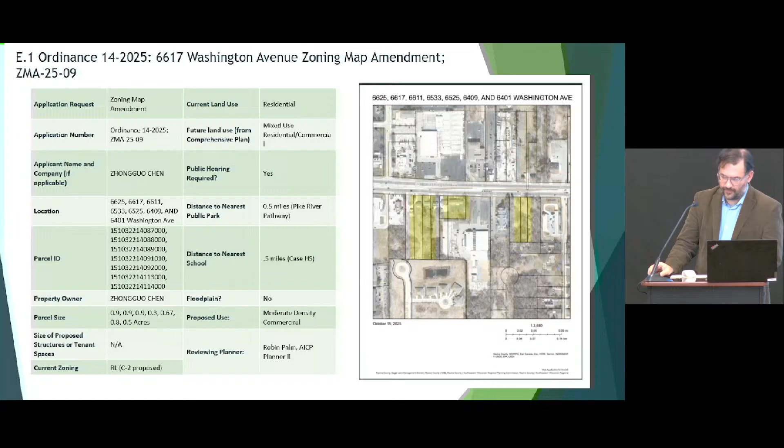The 6525 parcel is also currently split zoned, which you can see right here - it shares the pink and yellow, which is currently prohibited by Mount Pleasant zoning code, so it's kind of an artifact. That will be fixed.

The 2035 master plan lists all of these properties as mixed residential commercial, and given their location on a high traffic state trunk highway, staff's opinion is that it's unlikely any of these properties will have future RL uses or will expand their RL uses. The C2 district accommodates moderate intensity commercial, low intensity manufacturing, and upper story residential. High intensity commercial uses such as drive-throughs, gas stations, and auto repair and car washes are not allowed by right in C2. So it's pretty much zoning it as it has been used for quite some time.

I made a slight error in calculation on 6533. I was contacted by that property owner, Dennis Hardy, who emailed me and Sam about that conversion and was not in favor of it at first. We put up a sign in front of his house and he took it down. I got to talk with him on the phone and worked it out, and told him that his property had been assessed as commercial for 20 years, and that the zoning change does not prevent it from being rented out as a house.

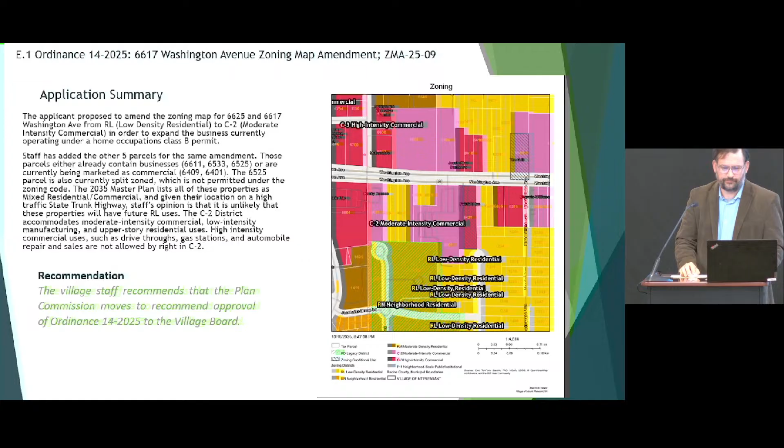I have one question. I drove by this property, and I don't know what kind of business this is or if it generates a lot of traffic, but I was wondering, is that going to create a problem? It's right next to the stoplight by Rocky Rococo's. Is there any way to connect it, kind of like Landmark Credit Union on the other end, and Emerson Road? There's a road behind it that connects with the back end of Rocky Rococo's.

Yeah, so there's actually a potential subdivision that we're in works with, talking to the south. It was an abandoned subdivision back in the mid-2000s, and we're finally cleaning up some of the property issues in order to move forward with that again. That's an issue that would be addressed by that, having a street behind there.

The other thing is, such requirements of access would assume that the building would change, so they would apply for a new building with commercial parking lot and all those kinds of regulations. This would be much like a lot of other homes on our state highways that are converted to businesses. They're operated as small offices essentially. We have insurance companies working out of them, hairstylists. I think Despin's Plumbing on Newman and Spring is just a house that's been converted over. That's the sort of uses that C2 would envision and allow. Any redevelopment beyond that would really need an upzone or more property.

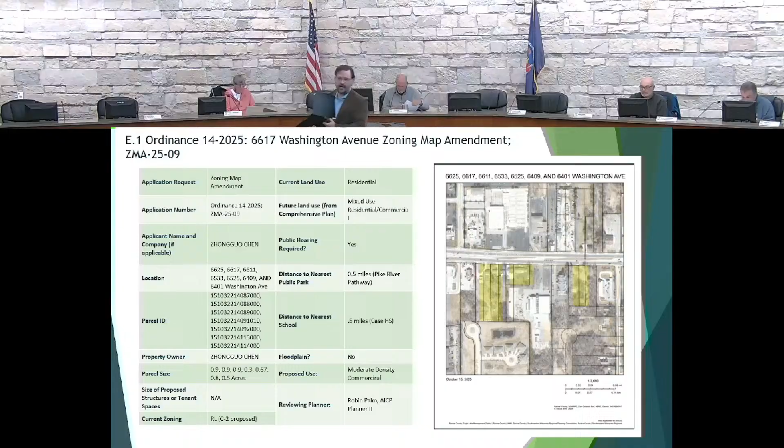Next up is 1501 Meadowlane Avenue Certified Survey Map, CSM 25-08. Mr. Chair, members of the commission, the applicant applied to divide the property into 2 lots. The division removes a double frontage lot, and the new lot configuration matches the lots both north and south of the subject property. Staff recommends 5 conditions of approval.

First, the applicant shall update the map to dedicate 40 feet to the public for the South Emerson Road right-of-way. Per the Village Comprehensive Plan, South Emerson Road is a collector street, not a local street, so it requires a slightly wider right-of-way. Second, the applicant shall update the map to show all the utilities underneath, which we require for new lots, so they can be served by public utilities.

That's a pretty technical map cleanup. Third, the applicant shall update the village's signature area to match the current clerk, Jill. Fourth, they'll need to construct a concrete sidewalk or asphalt path on one side of all frontage streets, or on one or both sides of other streets within the land division. Mainly, the new... we can get into that in a sec. Well, I'll just round back to that one.

And sidewalks, I love sidewalks. Fifth, they'll need to plant street trees of a species approved by you all, which is also specified in our ordinance, along the frontage for every 50 feet of frontage. So these lots will just need a couple trees.

I think the main issue here is sidewalks. You all have the power under land divisions to waive the requirement for sidewalks, as we talked about last month. If you choose to do so, we think it would be reasonable on the Meadow Lane side because there are no connecting sidewalks, and none within even a few hundred feet. But I would recommend we continue to have them on the South Emerson Road side, since they're only a property away from a sidewalk connection that goes through the reconstructed roundabout on 16th Street, within 100 feet of a connecting sidewalk.

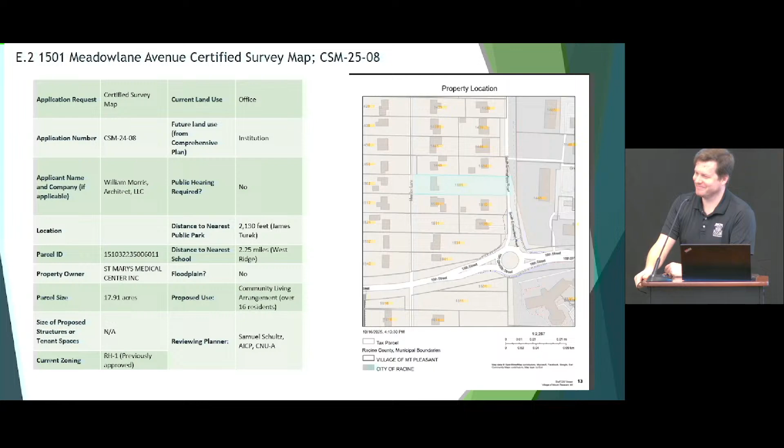And that is it. Otherwise, it complies with all the land use ordinances and regulations.

Yeah, to Robin's point, it gets more legal. Getting rid of a double frontage lot is nice. Well, I agree on that. I think that's really smart of them to do, particularly if they have the intent. I don't know if they're here to sell the other one. There's a huge demand for single-family lots, so they've created a lot of value here, I think.

Yeah, you can see the fiscal performance is not great because we have some low-density uses along Emerson Road, which is a collector street, so that side doesn't perform as well. But it does perform better than it does now because we're adding an additional house.

So it's over twice as good as it does. We typically try to require a little bit more density, but in this case, we'll take what we can get, and I think they're going in the right direction. And to divide this any further would not fit into the neighborhood. It just would make no sense. So it's a nice big lot, which someone will appreciate someday.

Yep, so no other issues. I would just need the motion and then clarification on which side you'd like to require sidewalks, or any other amendments to the recommended conditions.

Question, comment, Claire? Go ahead. The property directly south of the subject parcel has no sidewalk, but the one more adjacent to that to the south does. So is there some vehicle by which we can get at least those three lots to all have sidewalk? Or are we gonna have sidewalk, no sidewalk, sidewalk?

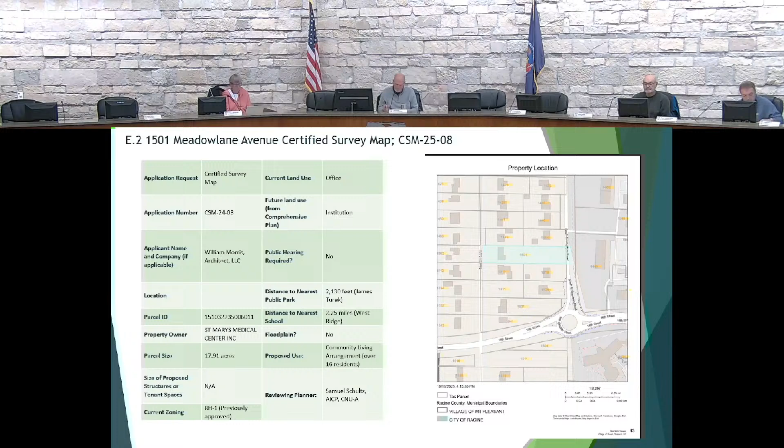Got it. Thanks, Robin. Okay.

Moving on. Item number 3, 6611 Spring Street, Certified Survey Map CSM 25-09. And Sam is still up there. Yes.

Mr. Chair, members of the commission, the application proposed splitting the existing lot into 6 lots and 2 outlots. Lots 1 through 4 would be available for development under the existing RM zoning district guidelines, which set a minimum of 9 units per net acre. Lot 5 contains the existing Aurora Medical Clinic, and Lot 6 provides shared access to the western lots. Outlot 1 contains extra land, and Outlot 2 contains a stormwater pond that serves the site.

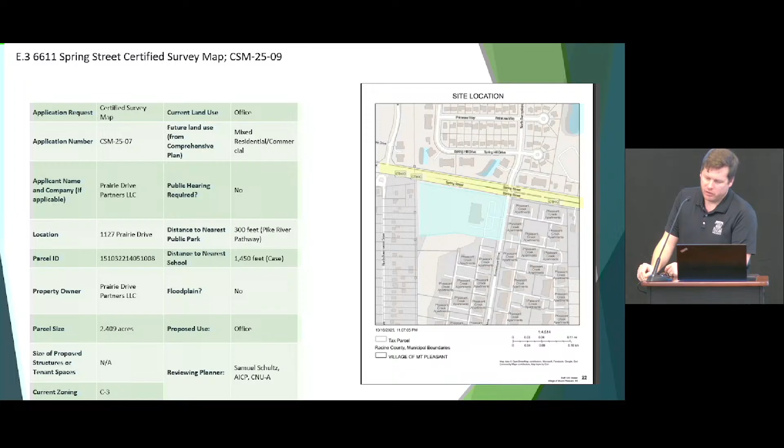The staff recommends that the Plan Commission move to approve subject to 4 conditions of approval. 1, the applicant shall modify the map to merge Outlot 1 with Lot 1. 2, the applicant shall modify the map to change properties zoned RL1 to RL and RM2 to RM — that's just a designation cleanup on the face of the map. 3, the applicant shall modify the map to add the existing zoning within the proposed land division; they added the extra territory around it, but not internal.

And then finally, 4, the applicant shall add the utility information that we previously called out, which they can get from the Public Works Director. So those are our recommendations for approval.

You can see in the fiscal analysis attached that this thing performs pretty well above all our target financial figures and ratios. Particularly, this is a low estimate because we just use the minimum density per the zoning district. If they go in above that, it would likely perform even better. So this is a really nice infill project along an arterial street in the village to add a little bit of density, but still complying with the existing zoning. So we really like to encourage these types of projects.

I think the only additional note, and it shouldn't hold up your recommendation, is that it's a little bit of an odd map when you look at it, particularly Lot 6, that shared access roadway. In large part, that's because some of the zoning district guidelines set a maximum lot size of an acre, so they're not able to pick up some of the ancillary parking for lots 3 and 4 without subdividing that and creating that tooth pattern that you see there. While we don't have an issue, and I don't think any of these lots are technically illegal under our code, it's certainly not our intent that this is how land divisions would look like when they come in. The idea is that you subdivide lots and then design buildings to those lots, and this is trying to merge those processes together.

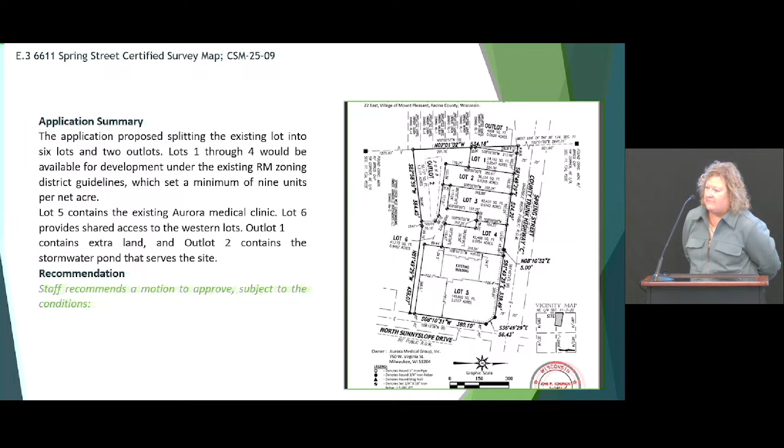Carol? Hi, I'm Carol Keene, I'm with Impact 7 Real Estate Group, 2965 Decker Drive, Rice Lake, Wisconsin. Hi, I'm Jess Timmer, the architect with Rinka. Our address is 756 North Milwaukee Street, Milwaukee, Wisconsin. Happy to answer any questions you have.

I think this is a little bit of a first-time process for all of us, having to subdivide - because we have four different buildings, instead of approaching it with one single lot, it's literally subdividing each lot to make sure each building meets all of your zoning requirements on an individual basis, and that they can stand on their own. So they're meeting the maximum lot size of the acre, the parking requirements, the open space, the minimum density per acre requirement, which I think is nine, but we'll exceed it on some of the lots, which is good. And literally kind of testing the zoning code as written, which you guys just updated, I think, in the last six months or a year or so.

But Sam's been super helpful, informative. We walked through the entire process. I think the plan for this is going to be great in terms of bringing more units that are badly needed in the area, that's going to be still high quality architecture with a mix of scales. We're happy to tell you a bit about the buildings if you want to know more, even though I know it's not maybe subject to your purview.

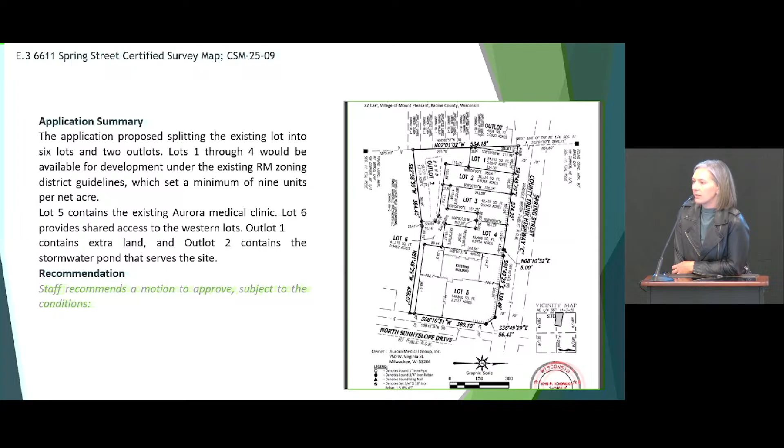So there'll be two of the buildings that will be single story, sort of what we call a cottage style - individual units on ground level with attached garages. And then the other two buildings will be kind of what we call a garden style, so two stories, also with some attached garages, some with detached garages. There'll also be bike parking on site, and then there'll be a clubhouse, an amenity that's shared across them. And then one of the outlots is the stormwater management and the bioretention pond.

Part of the preliminary site planning, we did this in conjunction with Aurora, trying to be good neighbors with them and discussing—Jackie's here, sort of on their behalf—to do something tasteful next door, basically. Instead of going much denser, which we probably could have, we wanted to be good neighbors and do something tasteful in the area.

One question you guys had was lot 6. That is part of our purchase agreement with Aurora, so we had to incorporate it as part of the purchase of the development. That's why it looks a little funky, because we will now be in charge of that easement coming into the overall development. That was part of the purchase and sale agreement for this 5 acres.

Do you guys have any other questions? We could knock out the site planning right now today if you want, and just stamp it and be done with it. Well, I see one thing—it's called Pike Creek Commons. Is that what it's called, one development?

It is one development, yes. Okay, that was my main concern when I saw the lots—wait a minute, this is really going to... and then you also mentioned you're going to have a clubhouse. Right, which is key to that—it's actually a single development. Exactly. And it looks funky. When you look at it, you're like, holy cow, I don't want to see that in my community.

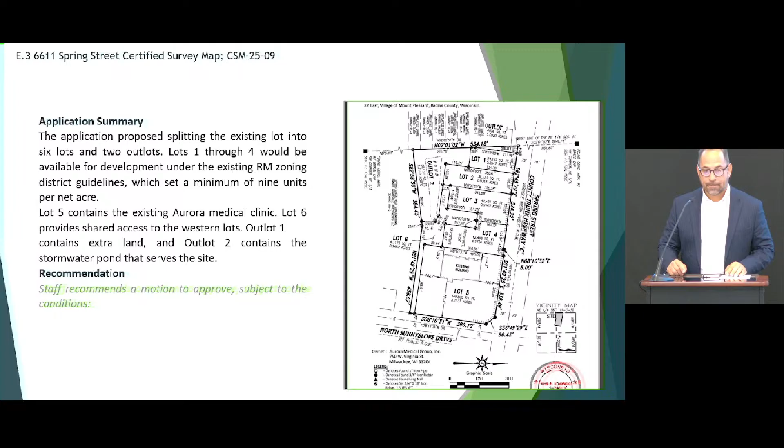Just to comment, even though it's not subject to our review, I think what I'm hearing is it'd be wonderful to be able to see plans and elevations, just to give it some context, if that's not forbidden by our code.

I want to be extremely careful about that. I understand the Plan Commission would like to see that. However, anytime state law requires that if they submit something and it complies, we have no option for residential development but to approve it. You have no legal leeway to deny a residential development that otherwise meets the zoning code. So while we'll try to provide more information, we're trying to dance carefully about not setting expectations for something you don't have any say over.

I think when we made that change to the code, that was an area where we had discussion about it and weren't real happy about it. The Plan Commission had a review taken away from us that historically had been in the Plan Commission's hands, giving us the opportunity to weigh in on these questions, rather than having items before us to approve that we couldn't envision how they would function. So I think that is a reasonable request, and yet I understand Sam's point.

Yeah, I mean, we're not trying to withhold information from you by any means. We're just trying to make it very clear about what you actually, by statute, have the authority to approve or deny. That's why we've shifted this focus more toward land division, which has created this whole downstream effect.

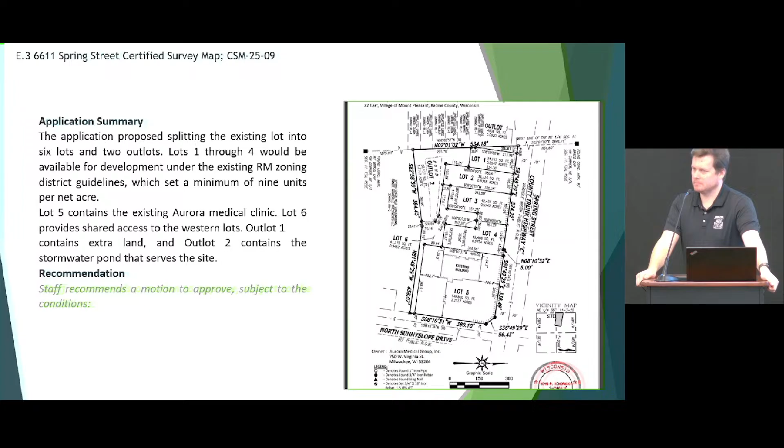It's a very obviously open spot, and everybody's going to go, what's going on there, you know? And I think it would be nice for the neighborhood to know that, hey, it's going to be a quality built housing project.

I just want to add, if it brings in access and circulation and stuff like that, and if the buildings being put on them makes that difference, that certainly comes under the purview of a lot split and what your review can be about. You could be able to say, well, on lot 2 the building's facing the wrong way, whereas this is how it should align for better access. That would come under this purview and something that you can review, I think.

But you wouldn't require it. Okay, now we have staff conflicting with each other. I don't know about that, but it couldn't relate. We should move us along, but we have 3 other items that absolutely need to get voted on tonight, so if we could call the vote, unless you have any other questions pertinent to the land division itself.

I do, if I might. My question is, first of all, these are rental properties, are they not? Yes. Okay, so my question has to do with the 45-foot access. I thought that under our code, anything being subdivided had to front onto a public right-of-way that met our right-of-way standards of 66 feet. Not if they have shared private access.

Okay, number 2, my comment is I would prefer to see this as a condominium plat, because in your review some of the comments you made were about if they want to sell off a building or sell off a part of the project. I think this bodes much better for some kind of a condo plat and overall site plan, because in my mind it would be ridiculous to sell off any part of this on a piecemeal basis, since you have a clubhouse and different types of units. In my mind it's one project that should not be sold off in pieces. So I would certainly promote that — again, we're still working with the code, still trying to figure out where it works and doesn't work, but in this case it certainly would have made sense to come in with it platted as one project. The setbacks still would have applied, so I understand.

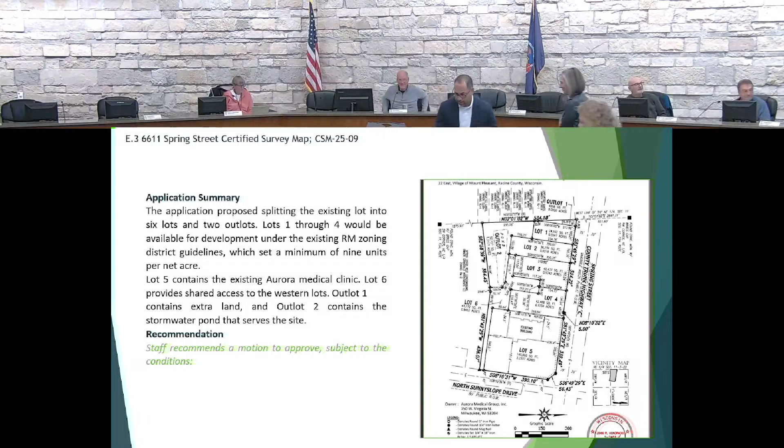Good luck, it'll be nice to fill that in. Be interesting to see the minutes for this meeting. You can talk to Brandy about that.

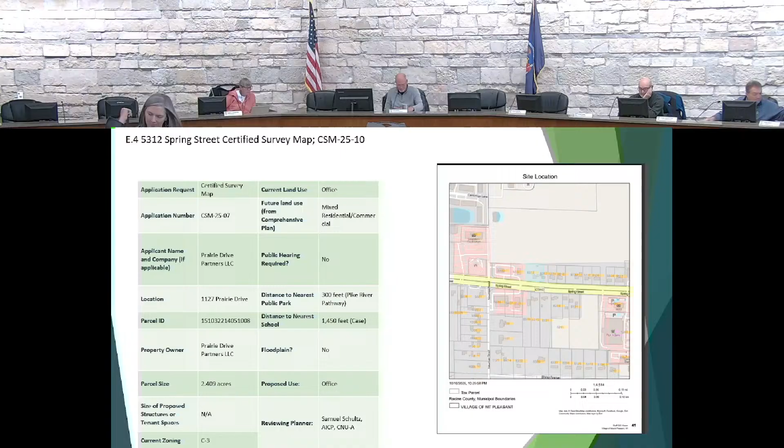Condition 1: applicant shall obtain approval from the Racine County Department of Public Works for any additional driveway connections to Spring Street, which is also County Trunk Highway C. Upon review, I did send this over to the county, and they said they would not grant an additional driveway access. So instead, I'd like to amend condition 1 to say the applicant will need to update the map to show cross-shared access between lots 2 and 1.

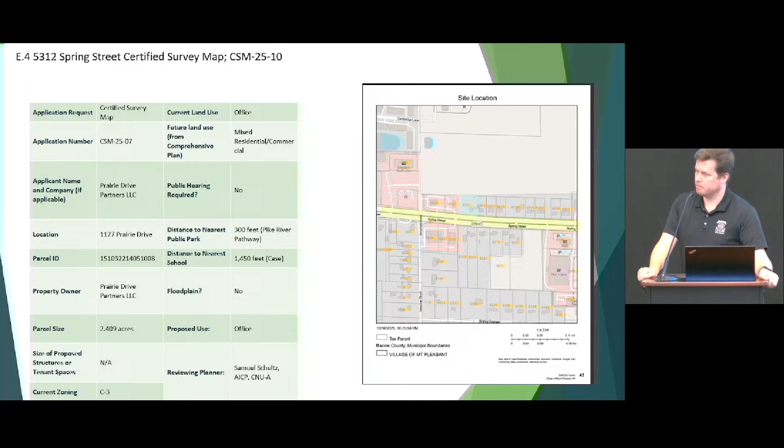Oh wow, that's going to be tough. It will be very tough, but that's too bad—pretty black and white answer from the county. They said it doesn't meet their adopted width for access standard requirements anymore along the county highway. So I don't think they'll get one. They could try to apply for some sort of variance from the county or whatever the county's approval process is, but that's between them and the county. I think in the meantime, to allow a developable lot, we have to force that shared access.

Yeah, but the way their house is turned, they can't even put them side by side. Maybe they can work with the county to relocate an existing driveway and bend it and still do it. But yeah, it's going to be a little bit iffy either way. Wow, yeah, that's tough.

But marching on. Number 2, the applicant shall remove the county signature line from the plat. Number 3, update the map to include the date of drafting. Number 4, update the map to include the existing zoning within and adjacent to the proposed land division. Number 5, update the map to show the minimum lot area required by the zoning district in which the land division is located. Number 6, update the map to show utilities.

Number 7, construct a concrete sidewalk or asphalt path adjacent to the land division unless waived by the Racine County Department of Public Works. My guess is the county will not allow a sidewalk there because they have not in other places, so I'm assuming the county is going to say no sidewalk. And number 8, the subdivider shall plant street trees of a species approved by the Plan Commission and Village per the ordinance. So really pretty standard, just some technical map information we want to see before it's recorded, except for that shared access requirement, which we don't have a lot of control over.

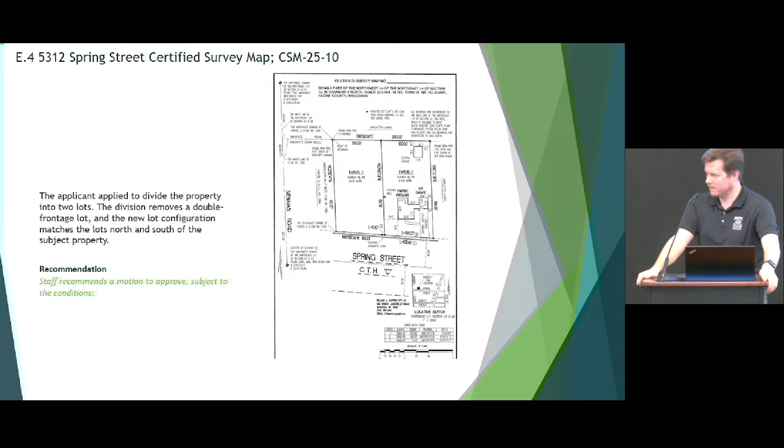That might just kill the project. I wouldn't doubt it, but at least we're doing everything we can to make it viable. It's going to go across the whole front of his house. Oh, well.

Yeah, if they wanted to do it, it might be a situation where both lots are a tear-down, rebuild kind of thing. Yeah, they don't live there, so maybe that's it. We certainly like people trying to add some value and some housing to the village, so we're not opposed to the use or anything else. It's just we don't control the access, and there's no rear access or anything else available in that area.

So it's pretty limited. If they want to try to get a variance from Racine County, good luck. I think that would be my caution to them, because once they record the CSM, the land division is done, and their second lot's going to be taxable as a developed lot. So that's why I would want to make it a smart condition—before we record it, I want to see some sort of approval from Racine County. Otherwise it's superfluous. And honestly, if it is a single access point and the county doesn't allow it, we would prefer it stay a single parcel, because then you could theoretically upzone it into something like a 6-unit building or something that better utilizes the land there while still adding some density. So generally, it's not our favorite to add these single homes along busy highways.

As the rezone that Robin spoke to first is kind of moving us away from that, it's again trying to balance some needs and wants here.

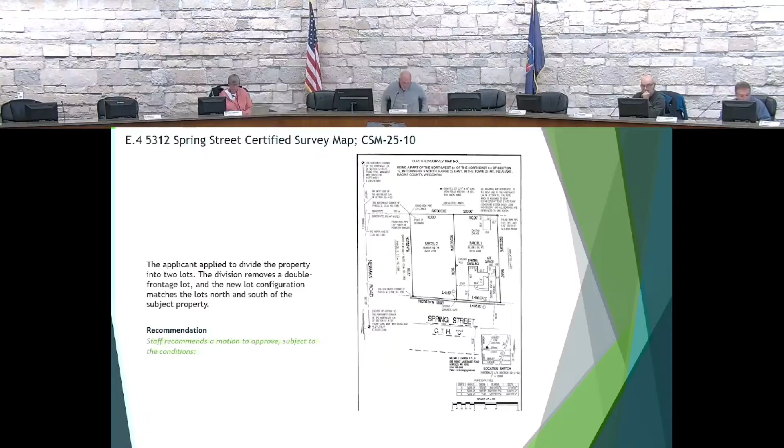Number 5, Resolution 11-2025. A couple easy ones here to wrap it up. Both are the same, so both are going through the discontinuance process, which is a lengthy one by the Wisconsin statutes. The village board introduced a resolution. We post some public hearing notices, and then the plan commission has to make a recommendation on these.

The first one is a public walk that was platted but never improved. So there's just kind of a random strip of land that runs between these 4 properties. They would like it removed. They've been maintaining it the entire time, and again, the sidewalk was never constructed at the time of platting. So it's kind of extra land to nowhere that they're already maintaining. We have no issue with discontinuing it.

These 4 property owners are the only property owners adjoining this public walk, so there's no one else affected by this. It doesn't extend east or west at all.

Mr. Chairman, these were part of the discussion we had over the subdivision being built to the west of them off of Brown Road. There's no connectivity from that subdivision. So we agreed at the board level, and I think in discussion, that that was not a problem, and that way they won't have to worry about people walking through their yards indiscriminately anymore. Give them some additional land and privacy.

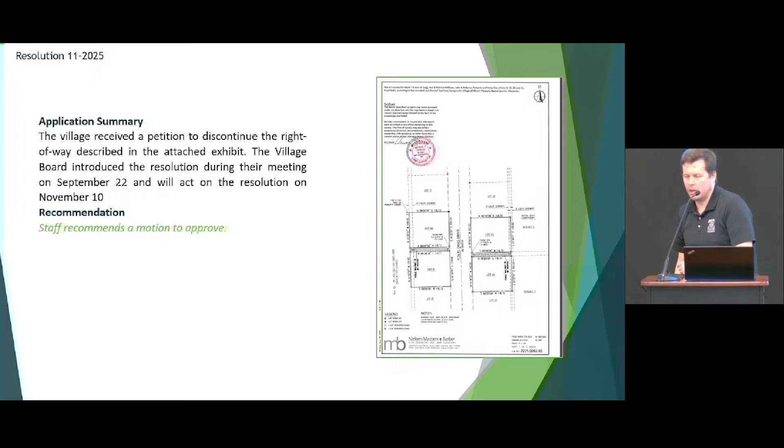And there's no access to anything. It's not going anywhere, back into other private lands. Exactly, based on the plats that were approved.

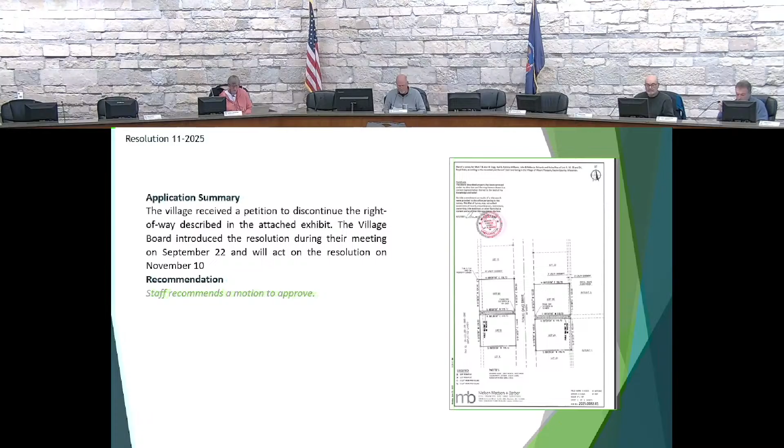So I would make a motion to approve Resolution 11-2025 for vacating the public way. I'll second that. Got a motion and a second. All in favor? Aye. Opposed? Motion carries.

Last one, number 6, Resolution 10-2025, discontinuation of a portion of Megan's Way. Same thing here, discontinuance. When they constructed Megan's Way, due to the approved site plan, they actually bent the road a little bit further north than it was originally platted. So they just need to remove this sliver from it to the south and clean up to get the final right-of-way. There's not a road or anything else here, just kind of extra land. So again, we'd look for your recommendation to approve.

Yeah, 1,100 square feet. The tax bills over there are gonna be hard to deal with now. I'll make a motion to approve the Resolution 10-2025, discontinuing a portion of Megan's Way.

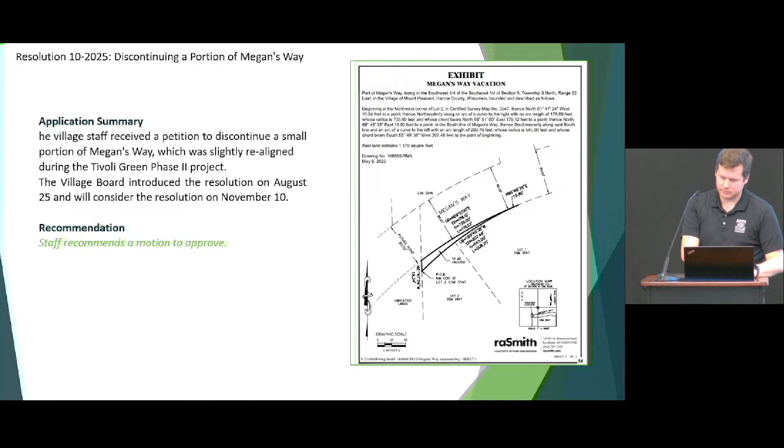We discussed this a while back. I remember this, I don't know if it was at the board level or where, but I know we saw this coming. Yeah, and both of these will be on the first meeting in November for final action.

So I made a motion. Okay, any other questions? Anybody? Second. Got a motion and a second. All in favor? Aye. Opposed? Okay, it passes.